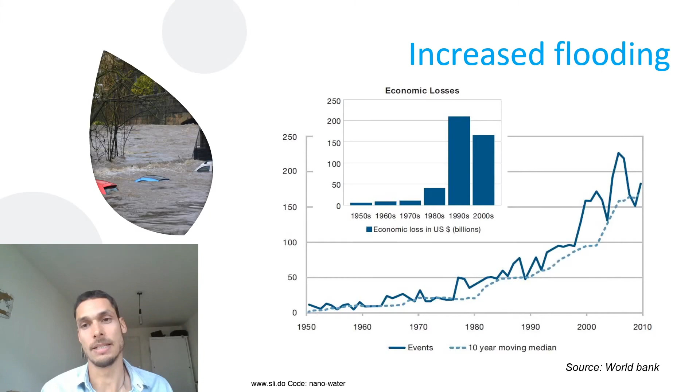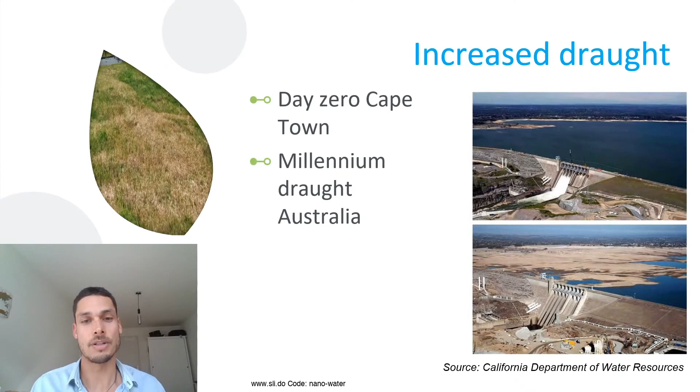At the same time, cities around the world are grappling with the effects of increasing droughts. In 2018, the Cape Town government announced the coming of day zero, where the water would run out. And at the beginning of this millennium, we had a very severe drought in Australia called the Millennium Drought, where there were very severe water restrictions being put into place. But also here, we're actually for the third time in a row in a drought in spring in Europe, and you can see the effects that it has on my lawn.

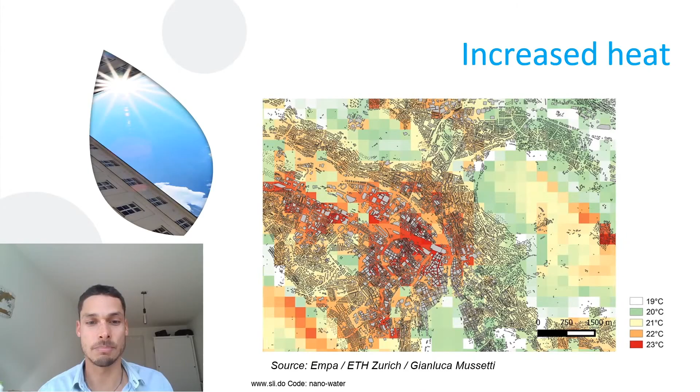The following problem might not resonate so much with people in Switzerland, because the waters here are crystal clear, but in large parts of the world, cities are not blessed with these clear waters. So I remember living in Sydney, close to Coogee Beach, which is one of the most famous beaches of Sydney, probably the most famous after Bondi. That after a long dry period, followed by an intense rain, there would be a newspaper advertisement saying, "Don't go swim on Coogee Beach."

And this was actually caused by the stormwater that was released into the ocean, because Coogee Beach is right next to the outlet of a stormwater sewer. And so the pollution that then washes off from the urban surfaces includes mostly phosphorus and nitrogen, which has a negative effect on the biodiversity in water, but also things like heavy metals and even pathogens, which makes the water very unsafe to swim in.

Increased urbanization, of course, leads to a decreased amount of green space, which actually has a very significant impact on people's health and well-being, besides, of course, the decline in biodiversity. Now, there are some exceptions of cities that have a lot of green space, such as Moscow, Singapore, and Sydney, where almost half of the city is covered by parks and gardens. But in a majority of cities, this percentage is much lower. In extreme cases such as Dubai, Istanbul, and Mumbai, this percentage is only 2.

Now, all this havoc is caused by 2 main drivers. The first one being climate change. Climate change leads to more intense rainfall, causing floods, but also longer dry periods, causing droughts. And it leads to more and longer heat waves. Now, climate change is an external driver that local governments, city governments, can't really influence. So that is the bad news.

Now, the good news is that city governments can influence the second driver, which is urbanization. And I'm talking mostly about the quality of urbanization in this case, because the quantity of urbanization is a bit more hard to restrict. But the quality of urbanization is something that city planners can actually influence with how they manage the city.

And water management is actually a major part of this. In a natural environment, this is what happens to rain. About 40% of it evapotranspirates, then 25% of it infiltrates into the soil and is available to plants to grow, and 25% goes into deep infiltration into so-called aquifers. Then 10% remains, which runs off into rivers.

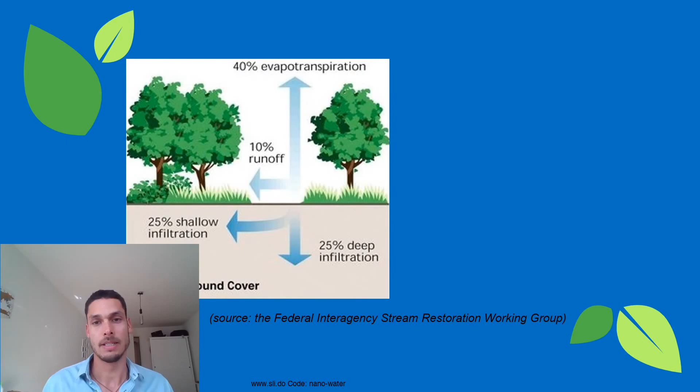Now, in an urban environment, this water cycle is heavily altered. So of the rain that falls in the city, about 30% is evapotranspirated. 10% goes into shallow infiltration in the soil. 5% goes into deep infiltration, which leaves about 55% to run off directly into rivers.

So this heavy increase in runoff makes cities much more prone to flooding, while the decrease in evapotranspiration helps actually make cities more hot because evaporation cools down an environment. And then the decrease in the infiltration actually makes cities also more prone to droughts because there's less water stored in the soil that can be used in periods when it doesn't rain.

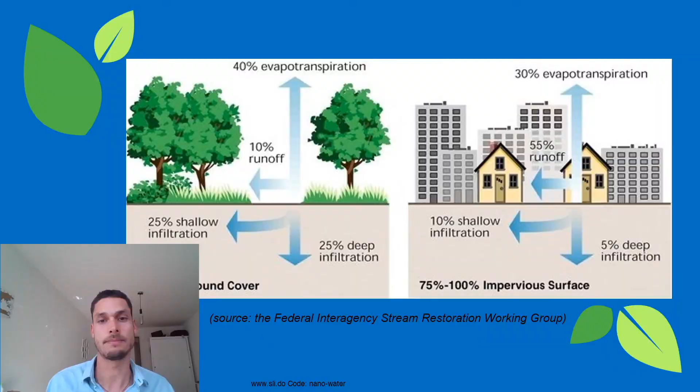So in order to decrease all these problems, we want to actually move from the situation on the right back to the situation that is more natural on the left. But how can we do this? One way of doing this is to move away from the traditionally used gray urban water infrastructure, where we put the water literally in the gutter and then it moves to the sewer system and as quickly as possible into the urban waterways, to move to more decentralized green-blue infrastructures.

Now, these green-blue infrastructures can simply be parks with a lake or a garden with a pond. But over the past few decades, civil engineering research has focused on designing green-blue systems that are specifically made to improve the processes of bringing the natural water cycle back into the city.

These systems such as wetlands, bioretention systems, and green roofs, they retain the water in the city, and thereby it has more time to infiltrate into the soil, it has more time to evaporate and cool down the city, and it can also be used to recycle and actually, for example, irrigate urban spaces like sports fields.

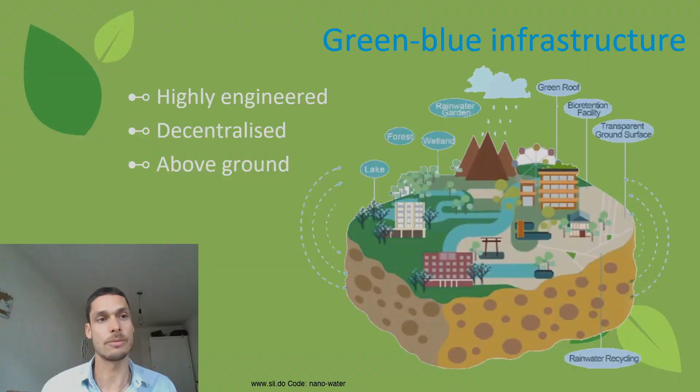Now there's a number of these systems around. For example, these rain gardens that are also called retention systems or biofilters. An example of a rain garden I'm showing here in the picture on the bottom of the slide. This picture I took in Oerlikon, where I live. And as you can see, this biofilter is a little bit lower than the surrounding area, so that the water flows into this biofilter instead of flowing into the gutter.

And then it goes through several layers of filter media that take out some of the pollutants that can be found in rainwater, in stormwater. And at the same time, they're planted with specific plant types that take up the phosphorus and nitrogen, which are two of the main pollutants found in urban stormwater. And plants use these nutrients to grow.

Once the water filters through this biofilter, it can then be infiltrated safely, or it can be put into a sewer and released into the natural waterways, or it can even be recycled and used to do irrigation, for example.

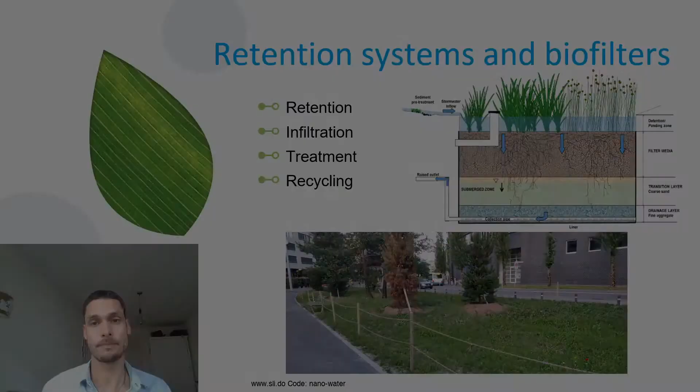And then at the same time, the water will stay in the lake for an extended period of time, which means that the coarse material, the coarse pollutants, will slowly sink to the bottom, and the water that then flows out of the lake eventually back into the natural waterways is cleaner than when it came in.

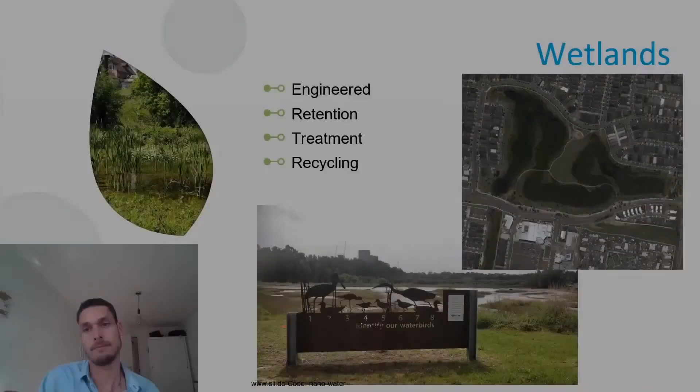Then a more advanced system are wetlands. In the top right picture here, you can actually see a wetland in Melbourne. And you can see that the water has to follow a specific course. And along this course, different water depths and different plants are used to clean the water, just like the biofilters are doing. Because the water has to run through this course, it also stays in the city for longer, and it in the end can then be slowly released into the natural waterways.

And these systems are actually ideal for places where there's not a lot of space, so in dense urban areas, because they can just be built on buildings themselves. And if they're designed properly, they can fulfill the same function that an urban wetland, for example, does, because they can retain the water, they keep the water in the city, and slowly treat it, clean it, and then release it.

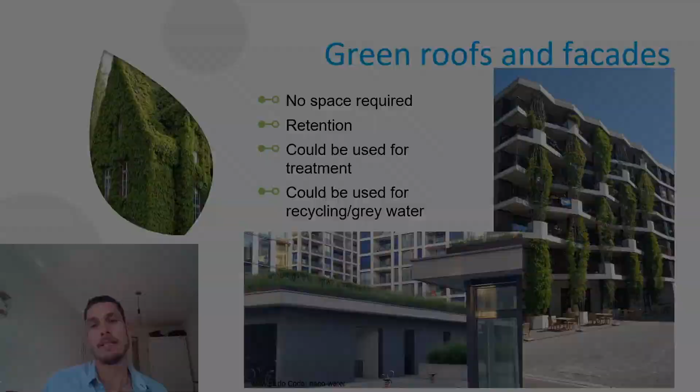Cities around the world have started implementing these systems, although very slowly over the past decades. But they're called differently in every part of the world. Here in Europe, they're called nature-based solutions, while in Australia, where I studied them, we refer to them as water-sensitive urban design. In China, they use the analogy of a sponge, which I personally find really apt. So they call it Sponge City, and they're currently investing billions of dollars to turn, I think, 38 major cities into these so-called sponge cities.

In the United States, these systems are referred to as low impact development, whereas in the United Kingdom, they use sustainable urban drainage systems. So it's called differently everywhere, but it all refers to the same thing. All the different approaches and different technologies have a few things in common. They use plants, and they retain the water and clean the water. They recycle the water, and they're decentralized and therefore more flexible, increasing the resilience of cities, buzzword. And they have a large number of economic and environmental benefits.

So economic benefits include flood protection, which leads to lower damage costs, but it has actually been shown, in a study done in Sydney, that houses around rain gardens or biofiltration systems are actually tens of thousands of dollars more in value than without those rain gardens. So there are these direct economic benefits. And at the same time, there are a lot of environmental benefits with decreased pollution into our natural waterways, increased biodiversity, and of course also the cooling of our cities and the increased amenity of having more green space in your city. That makes a city more attractive and gives people space for recreation.

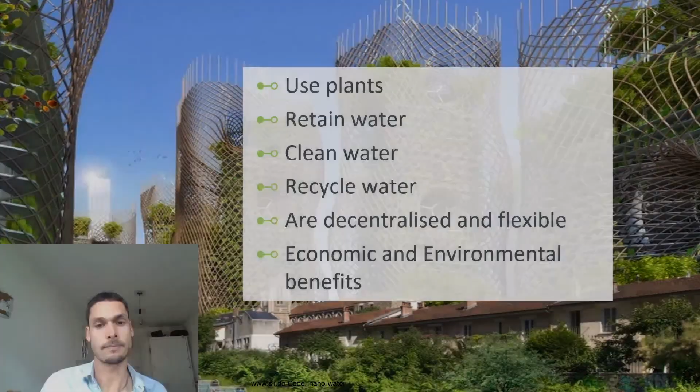So if we know all these benefits and we have these technologies available to us, why aren't we using them more? Well, the answer is simple. The current traditional urban water systems are underground, while these green infrastructures are above ground, and so they're not so simple to implement, especially in dense existing urban areas. To make these systems successful, there's a lot of different things that need to be considered in the urban planning. For example, what is the local hydrology? Where does the water flow to? What is the slope? But also, what is the acceptance of the people that live around these systems? Will they be able to appreciate these systems? Where is space available? And what is the price of land, and can we afford to build a system there?

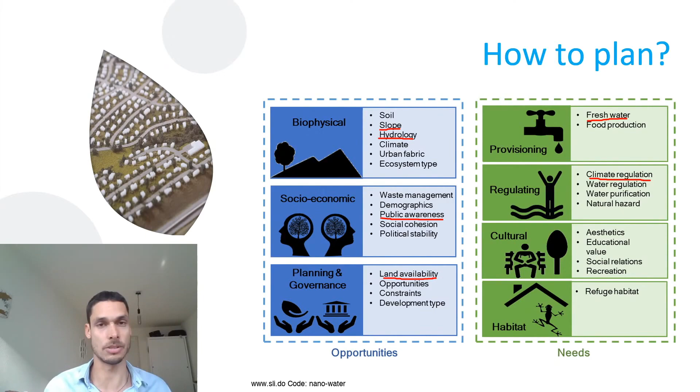But on the other hand, also, where do we need all these benefits that we get from the systems? Where can we use the recycled water, for example, to irrigate sports fields? Where are the hottest spots in the city that we can cool down using these systems? Where is there a big lack of green space, and where could the city really benefit from increasing this green space? And even where are biodiversity hotspots? So all these things need to be taken into consideration when we place these systems in the city.

Because the planning for these green-blue systems is so highly complex, in many cases, urban planners resort to what they know, which is just implementing gray systems, sewer systems. And even if they implement green-blue systems, they often do it very randomly. So they just place them wherever they find space or wherever they're redoing a park. So because of this, a lot of people in academia have started thinking of ways to help urban planners improve their planning processes. And one of these people was myself in my PhD. And what I've come up with is a very simple model, a spatial tool called SSANTO, a spatial suitability analysis tool, which gives urban planners this map, which you can see here, that has a simple color code indicating the highly suitable and the less suitable locations to implement a specific green-blue system in the city.

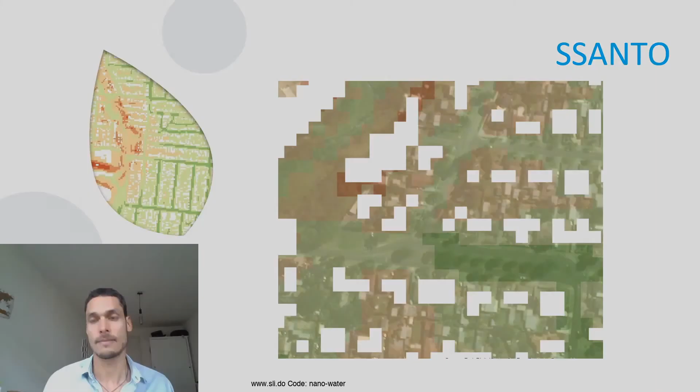Slowly, cities around the world are becoming more green-blue, and the good news is that everyone at home can actually contribute, for example, simply by removing tiles from your garden and putting a plant in place. I know in my home country, they actually have a program where you can bring tiles from your garden to the municipality, and in return for these tiles, you get free plants to put back in your garden. Recently, only like 2 weeks ago, I saw on the Swiss news that the city of Zurich is also implementing a big urban greening program, which I was really happy to see. Their focus is more on urban cooling for the hot summer days, but the principles are all the same, and the increase of green-blue spaces will also help with all the other issues that cities are facing.